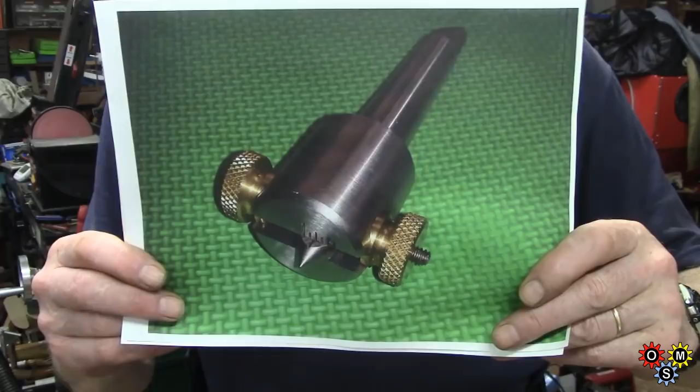As a reminder, I've just done some yard work, one of many things that keeps me out of the shop. You may remember this tailstock offset centre. It's very small actually, only really designed for small lathes, but my old lathe isn't likely to do much super heavy work, and for the odd occasion I need to use it, it'll do the job.

One of the clips I showed you had an error, a problem, because I started on 4140 and had a rigidity problem, so I used some fresh material. I didn't have any more 4140, so I got a length of 1045 I think it is, from my friend Dick Lynn, machinist. I visited him last year. So I got this length of 1 5/8 and turned part of that down a little bit, left it much larger than the 1.5 inches from the plans, so I've scaled things up just a little bit.

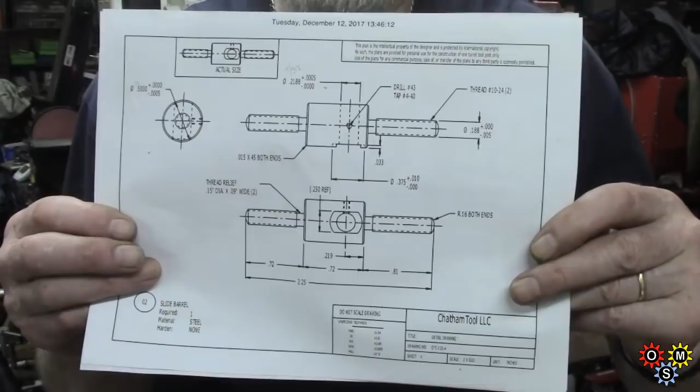What you'll see in this video is just making the main body, which looks dead simple, but there's several things to do. What I've got left to do, which will be in part 2, is the cross slide, threaded each end, and the centre section takes the centre, and the centre itself, which is actually not all that big.

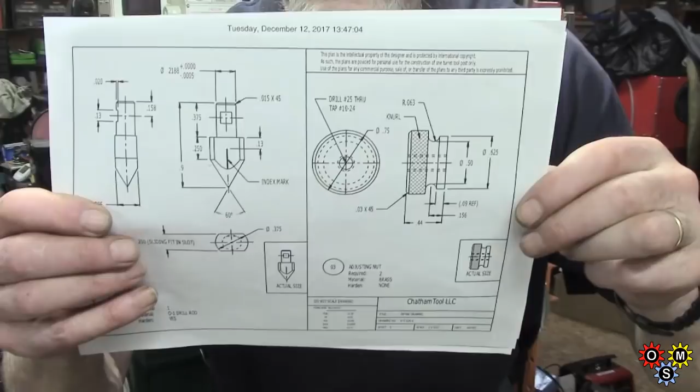You can see that. And on the right hand side, as you're looking at it, that's the control knob, shall we say, for each side, so you can advance it one way or the other. And in fact the centre, I've got some 3/8 inch drill rod which I'll use for that, so I can harden it.

Anyway, that's about it, far too much waffle, always is. I hope everybody's surviving with this crap weather. I know I always talk about the weather, but there's always something to talk about. I've got standing water out here you wouldn't believe, but not as bad as some areas. I did mow yesterday and chewed up the whole place because it was so wet, but today it's even wetter.

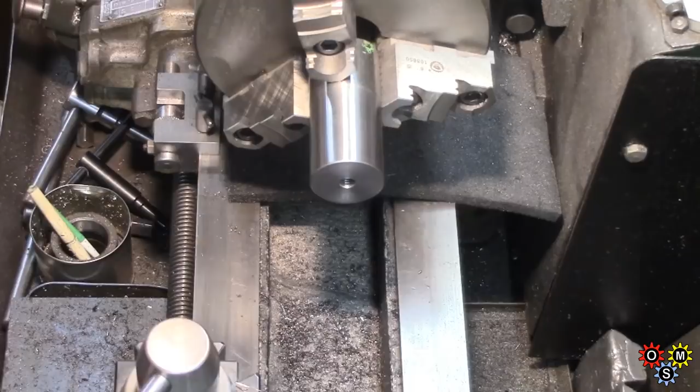Well, making a start on this tailstock offset, the plan suggests using a Morse taper for the spindle of the quill of the tailstock, but I'm going to go different on that and eventually bore this out to 1 1/8, so it will go over the quill and have an indexing lock screw at the bottom to engage in the keyway.

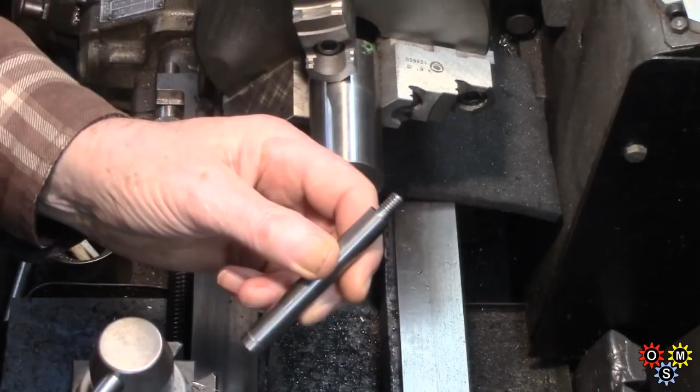Anyway, at the moment I've just prepared this piece of 4140. It's the only darn piece I've got, and I haven't got much else close to the size I want without turning down. So what we've done so far, we've drilled that and threaded it. It's actually 5/16 18 I think, and this piece of 1/2 inch already had a bit of turn down on it, so I've just threaded that.

What I'm going to do in a minute is put some medium Loctite on that, and the reason is I want to be able to use this in a 5C collet, in a collet block on the mill, because we've got to finish up with a 1/2 inch hole all the way through, which is to take the sliding index system, and 90 degrees to that we need a slot. It'll all become clear as mud later.

And I think the slot possibly may have to use a slitting saw for that. I haven't quite worked out how I'm going to do it. Anyway, this is the starting point, so I'm going to get this with some Loctite and let it dry off, and then we'll come back whenever I get to it.

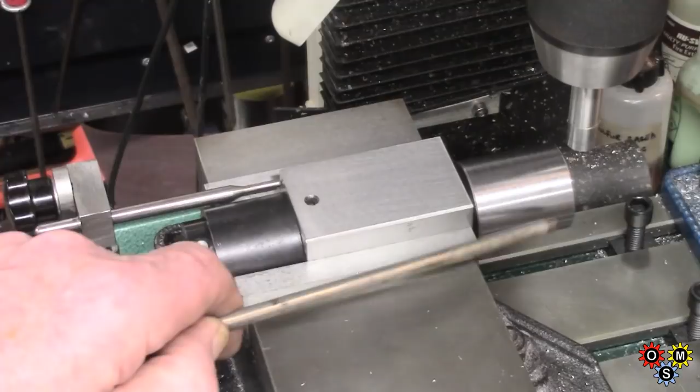Well, here's the mill set up. Collet block with a 1/2 inch collet, which is holding the temporary holding piece that we showed earlier. The table mounted stop here, so we can rotate that reliably, and just got to do the edge finding there on the face, which we cut off before and faced, and then get each side set up with the edge finder, and then we can proceed.

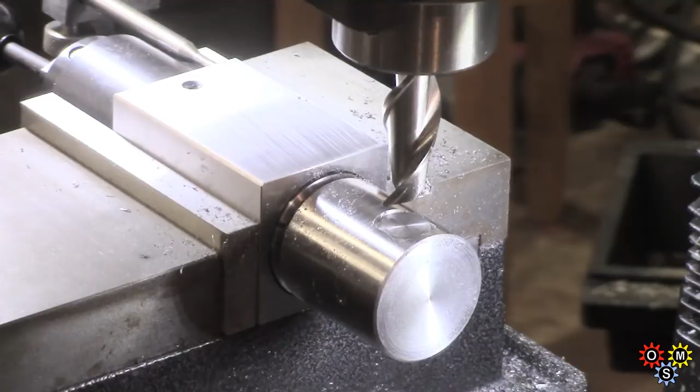Houston, we got a problem. I'm using the collet block because of indexing requirements, because I've got to work both sides here and then drill through, and then I've got to get an accurate 90 degrees to drill and tap a hole.

But the problem I've got here is this is not rigid enough. I did actually set up a screw jack underneath just to try and help, but it wasn't really very good.

What I think is the problem is twofold. Firstly, being 4140, it's not so easy to machine, and secondly, I'm only on a 1/2 inch, shall I call it a threaded arbor, and that probably means there's just a small amount of movement. Although I'm up against the collet, the thread going into this is only 5/16, and that's probably nowhere near adequate.

So I can't even really safely finish this side, which has got to be just a shallow pocket, one each side for an adjustment, and then I've got to drill through. So I think what we're going to do is find some other material, which I probably have to turn down because I haven't got any 1.5 inch handy, and make a much more rigid machining arbor, so I can get rid of the very slight flex I'm obviously getting. I don't try and cut that anymore, it's just not kind to the cutter.

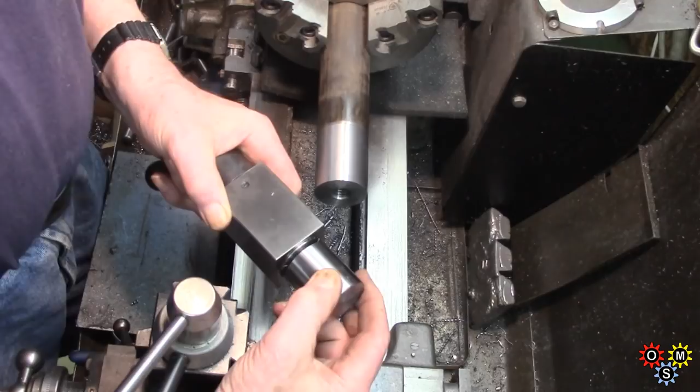Alright, we're back eventually. Well, this was the problem I was having on the old setup. You see, I started milling a flat on here, which has got to go a bit deeper, one each side actually. And the thing is, probably stupid me actually, I've got this 1/2 inch piece and there's only a 5/16 thread in here, and because this has got to stick out a bit from the vise, just not quite rigid enough.

So what I've done, I'm actually going just a little bit bigger than 1.5 inches, which is the plan size. This is a piece of 1 5/8, and I've just tidied it up on the outside. I've put a thread in here, 5/8 11, which is pretty coarse. In fact, I haven't cut a full thread because it's just hard work.

So I've got to make a piece of, oh, I see, I found an old piece of material, pretty mucky. That's got some thread on it. I'll cut that off or work on the other end and put a 5/8 thread on, and then we'll put that into this end with some medium Loctite, and hopefully that will help when I come to use the milling cutter again.

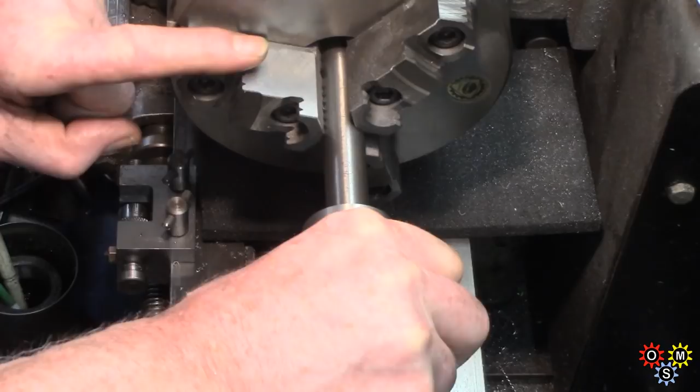Now this is very short thread. It's virtually a 50% thread, and I'm cheating. Excuse me. This has got to be bored out eventually, and tapping this is 5/8 11, and tapping it was pretty hard work. It's not a very good tap that I've got, so I've just got enough thread to engage, and then with some medium Loctite in there, I think it'll do. We'll give it a try anyway.

Well, we've got the same basic setup as I showed earlier, but which turned out not to be working very well. I'm just finishing a cut on here. I'm only going down into this about 80 thou. I've just got a tiny bit to finish, and I'm taking very light feed.

So I think the extra rigidity is making quite a difference there. Whoops, sorry, hand and arm.

We just got a full circle on there, and the next thing is to drill through, and we'll do the flat on the other side after drilling. We've got to finish up with a reamed 1/2 inch through here. So we'll go down small and get a pilot.

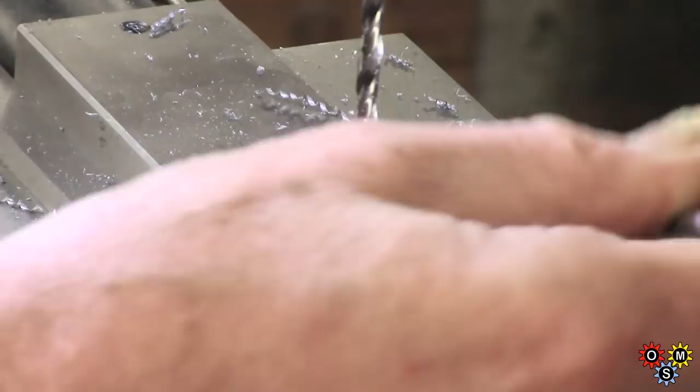Right, that should help with the next size. I think I'll go up in 2 steps and finish up at 31/64. So we'll change over. I've actually got a nice fresh stub drill for this 31/64, so I'm going straight for it. I'll get away with it, I think.

Well, that shows you how this little machine doesn't really have enough torque for some jobs, so I've got to take it a bit steady, and I've only got 2 inches of quill travel. That's why I'm starting so low down. Let me carry on. I'll bring you back in a minute. Now I'll just get this reamer through, see how we go.

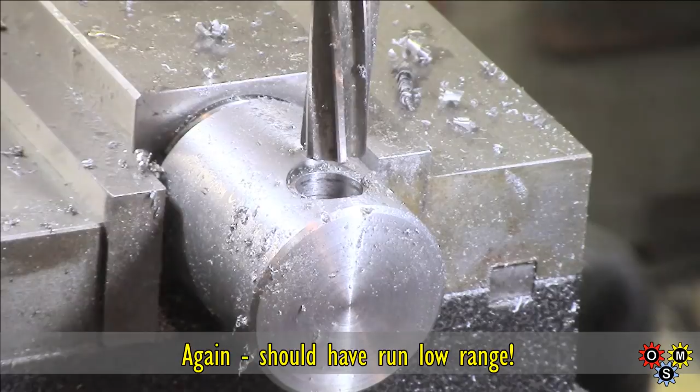So yet again I haven't got enough damn torque. It's crazy, isn't it? I'll have to persevere on that, take it gradual. Oh, it's amazing the drag you get just from a reamer, particularly with a pissant little motor driving it. I'm through now anyway.

Yeah, that was hard work, and a Bridgeport would have just rattled through it with no problem. Alright, we'll turn over and mill the other side. Now I'm just going to mill down on this side. Take it slow.

Well, that was quick because I already got a hole. Now the next thing, which is a slight headache, I'm just trying to see if we can show you. We can look at this on the plan.

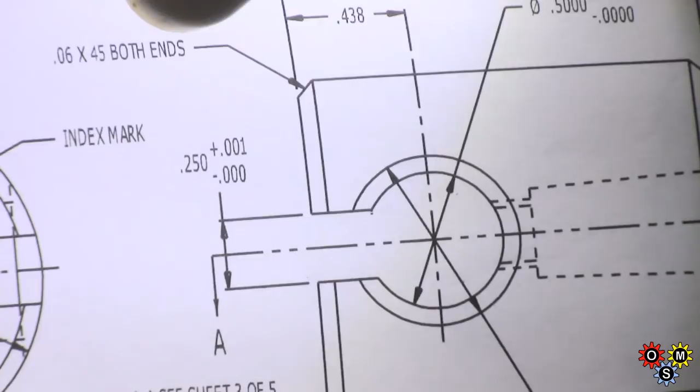Right, see here. We need a transverse 1/4 inch. Now, because I'm working on 90 degrees and using the collet block for accuracy, I think I'll have to cut that with a slitting saw in increments, which is a bit of a fiddle. I'll see what we can set up and try and do that as accurately as we can. I'd like to use a milling cutter, but I don't think there's a way I can do that.

So we're going to try this approach with a slitting saw. This saw is not staggered tooth, and the tooth dimension is 0.055. So having done a careful touch off up here, we've subtracted the 55 thou, and then we've dropped down to a calculated point here, and we'll take a cut all the way across, and then we'll come down by a 1/4 inch minus the tooth thickness. See how that works out.

To play safe, I'm trying to go about a thou down, and I'll go just probably a thou less down to my next cut, and that leaves me the option to finish the slot with a file and/or adjust the centre which is going to go in there.

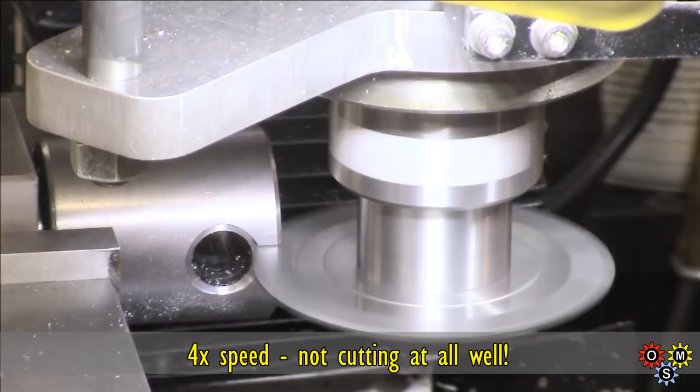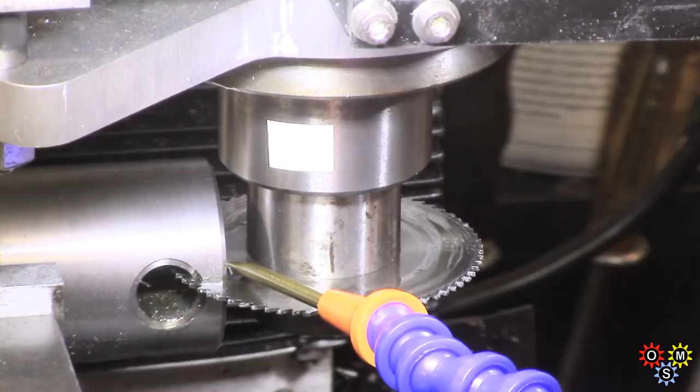Well, not quite bozo, but problems. That other cutter was making quite a wide kerf, although it's got tungsten inserts, but it was making hard going of it, so I've changed to a much smaller one, fine tooth and a bit of oil drip, and I've set it up as close as I can to the original cut. Nothing ever goes quite right, does it?

Well, at least that was a better cut. I've got to check the thickness of this and decide how far I've got to drop down. I think this is one of the worst damn saws I've ever used, but it was all I have that seems to suit the purpose. And trouble is, quite a lot of my slitting saws I bought used, so you never really know what they're going to do. But I think we'll get away with this one. I'm going to take the second cut and see what we finish up with.

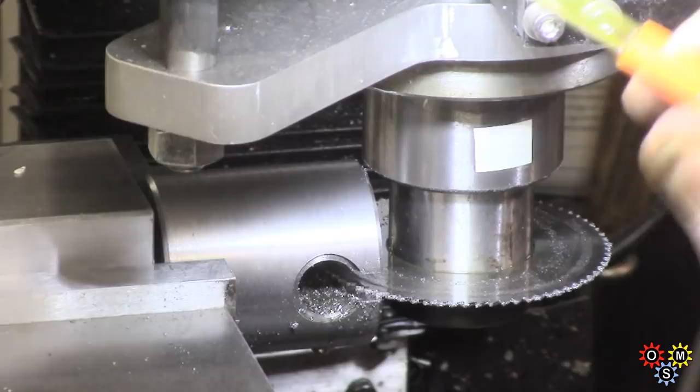Well, there we are. I actually had it a bit far in. I was catching the arbor on there. Anyway, we've got the cut. Sort of.

Now the final thing before I move this, seeing as I'm going to bore out the back to go onto the tailstock quill, I need a threaded hole in here at 90 degrees to engage with the keyway, so that's got to be done whilst we've got accurate degree setup.

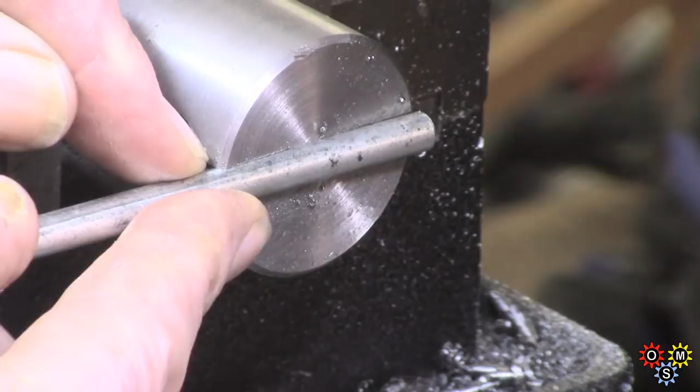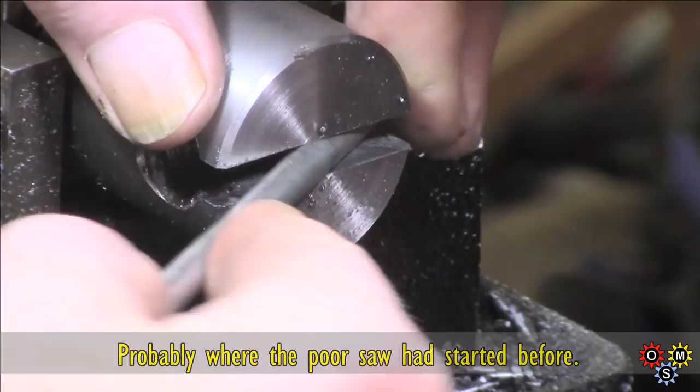Just out of curiosity, before I do anything else, a piece of quarter inch rod here. Tiny bit tight here for some reason. Very slight, probably a couple of tenths. So I'm quite pleased with that after all the messing around. Yep, I'll probably just finish that off with a file if necessary. I've only got a drilled quarter inch because it's all going to be bored out later to 1 1/8 inch.

I shall be tapping that through later, but I'll just make a tap start which will make it easier when I come to it later. 1/4 this is. So that gives me about 2 threads to start for a hand tap later on, when it will become a through hole.

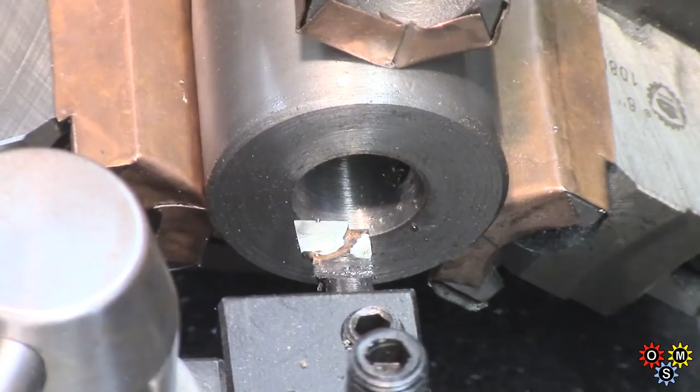Well, to get this bored out, you may not see a lot here because I'm using a very short, small boring bar. So I'll video a bit here and then I'll just press on and bring you back when we're getting closer to target, which is 1.125, 1 1/8 inch for the quill.

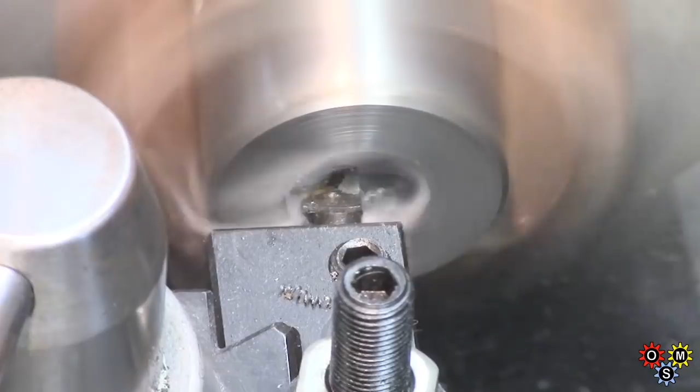I'm getting closer on this. Fairly soon I'll have to take it slow and do some careful checks. I'm using the same boring bar because it's working alright. It saves me setting up again.

Not quite the best of finishes with this tool, but I think I'll carry on with it. It's holding up pretty good. Yeah, so I'm just on the last cuts here.

Right, well, I haven't put a chamfer on here yet, but moment of truth, acid test. Let's see what the hell's going to happen. Here we go.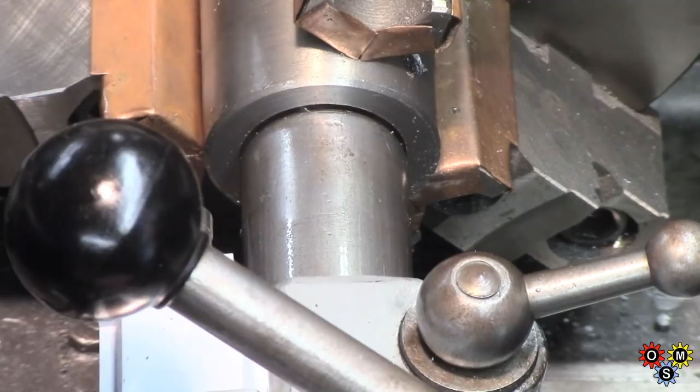Oh yes, that's - I think we're there. Yep, I think I like that. It's probably more by luck than good judgment. I always reckon you take care on stuff, but sometimes it doesn't work out, sometimes it does.

Now I've got a load of chips to get rid of. So let's put a chamfer on this and then take it out and deburr it generally.